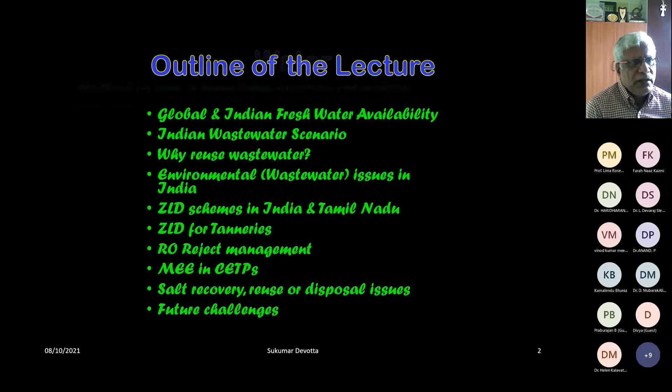Water is a very important commodity for our survival, ecosystems, industries. You must understand water is like energy, almost - it can neither be created nor destroyed. Although you can say water can be formed during chemical reactions, and water also takes part in chemical reactions, the water created and consumed is negligible compared to the water around the globe. So you can say with a lot of certainty, water can neither be created nor destroyed.

So if that is so, why are we facing scarcity? This is the problem. People are saying the world over, population is increasing and fresh water availability is remaining the same, and we are polluting more. Therefore, fresh water will be difficult to get in the next few decades, and it becomes a crisis for the world. The major problem is man-made activities, and there are some issues with climate change. I'll show you that.

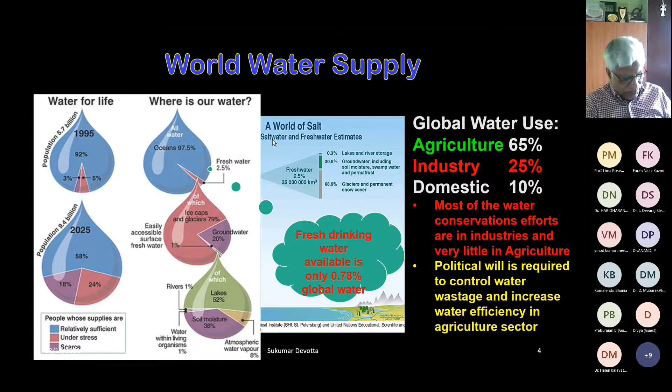Therefore water availability in India is dwindling. This is what I meant by the global water cycle. Water gets evaporated, goes to the sky as a cloud, then comes back as rain, and runoff to the river. But the problem is...

What climate change is saying is that this cycle is not going to be affected in total - the total water available in the water cycle is almost the same as what happened hundreds of years ago. But the pattern of this recycling - water getting evaporated, vapor transpiration, vapor cloud, then precipitation, runoff - these quantities vary independently, while the total quantity remains the same. What IPCC was saying is that if the rain used to spread over 3 months, now the same rain can come in 3 days. So the intensity of rain can increase significantly while total precipitation remains almost the same.

In Bombay, it has happened many times that annual rainfall occurs in a single day. No drainage system can capture that water and drain it properly, so flooding happens. The airport was fully underwater. This is happening all over the world. In New York, just a few weeks ago, the entire city was underwater, including the subways.

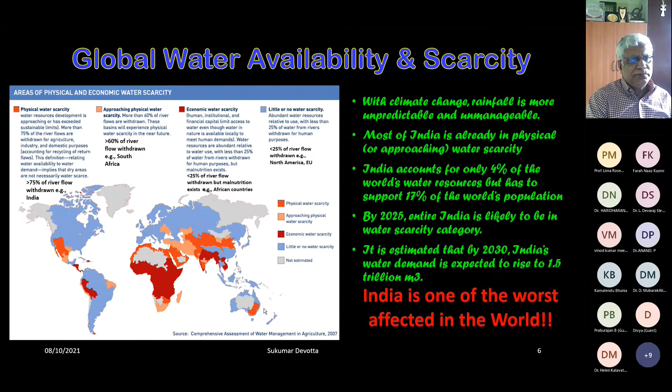What are environmental needs? In environmental engineering, one of my PhD students worked on environmental water needs. It says a river requires a certain minimum amount of water for sustainability of its ecosystem. If you don't provide that water, the river cannot sustain itself and it dies.

I'll give a very personal example. I was traveling from Madurai airport to Dindigul to look at a ZLD project, and I saw a huge bridge. I asked the driver why there was this huge bridge with only shrubs and trees on both sides. He said, sir, this is the Vaigai, we are driving over the Vaigai, and now there is no water, so there are shrubs in the entire river. That is the level of water shortage now. Vaigai used to flood, but now it has shrubs.

This is because we have not provided environmental water needs for rivers, and we have over-drawn. Now, Palar is a classical example. I'm talking about Tamil Nadu because I live there and am familiar with its rivers. We drew a lot of water from Palar and polluted it, and now there is only undercurrent aquifer flow, with no surface water in the Palar river. All these things have caused a lot of water scarcity in rivers.

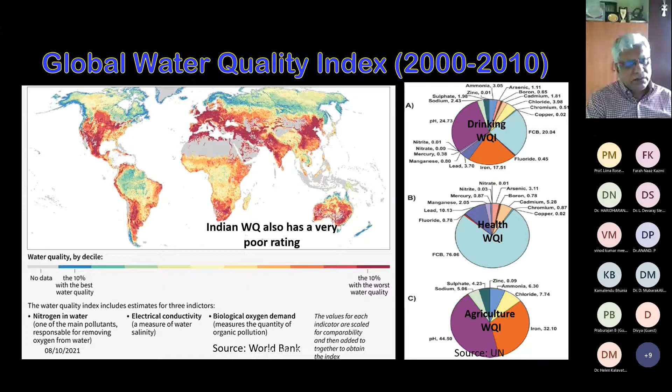And our population is increasing. India has only 2.4% of world area but 17% of the world's population. That means we have to supply much more water than we did 100 years ago.

We have a certain quantity of 1,123 billion cubic meters of water resources, and per capita water availability is 1,720 cubic meters. Usually all scarcity is defined with respect to per capita water availability, and this is below the scarcity line. That means we are already in water scarcity.

When you go for a building sanction to the government, I used to be chairman of the Maharashtra committee, so I know this situation in Maharashtra, but not much in Tamil Nadu. We used to ask, who is going to give you water? A builder might say, I'm a big builder, I have all the money, but who is going to give you water? He has to show the committee that he will have water either from the corporation or drawn from a nearby water body, and he will treat it.

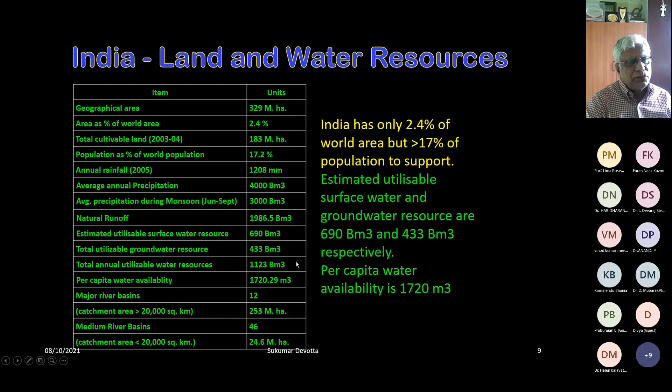This is not easy because for every person he is building for, there is 135 LPCD, liters per capita per day, that much water should be available in a flat or dwelling. If there are 5 people, you multiply by 5, and if there are 1,500 people in a condominium, he has to show 1,500 into 135. Many times they may only get 90. Where is he going to get the remaining 45 LPCD? So this is an issue now in most major cities, because population is increasing but water is not available since we are not able to store runoff. That's where my talk becomes important.

What do you mean by wastewater? Industries use water for many purposes, including manufacturing. They could also be using it for heating in heat exchangers, cooling, as a solvent in cleaning, in textile and leather processing, as a carrier of raw material, or as a carrier of waste matter.

In domestic use we have two types of water. One is called grey water, which is wastewater from your shower, kitchen, washing, bathroom and all that. That is not much of an issue because it may contain a little bacteria but not much microbial contamination or disease-causing microorganisms.

Black water is what comes out of feces and urine in toilets, like flush water. This is difficult to treat because it contains human waste and could have a lot of disease-causing bacteria, so we need to be careful handling black water. In most situations, we target grey water and treat black water for use in some other purpose. I'll come to that.

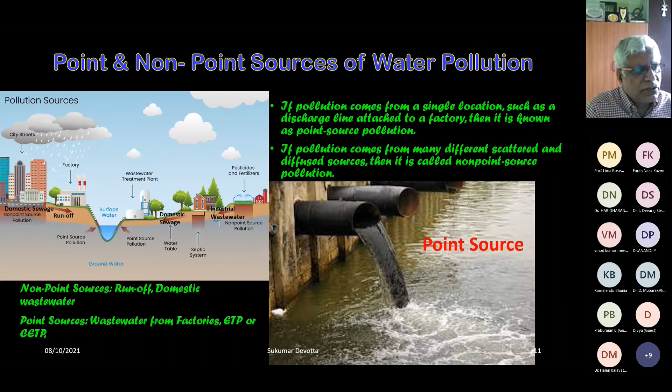So you have non-point source: domestic sewage and some small-scale industries, and runoff from agriculture with fertilizers, detergents, particularly phosphates and nitrogen, causing eutrophication. The river's BOD goes up and dissolved oxygen becomes negligible, so it's not able to provide shelter for biodiversity, microorganisms, fish and things like that. And point sources include industrial discharge and thermal pollution.

We didn't consider this a major issue before, but now it has become one. Earlier we could let out water 5 degrees over the water intake temperature. If I take water at 30 degrees Celsius, I could release it at up to 35 degrees Celsius as cooling water.

But now in some cases it has been reduced to 3 degrees Celsius. That's 3K - the difference between intake and outfall cannot be more than 3 Kelvin.

Earlier we could reuse the water repeatedly, but in some cases now they are requiring it to be one pass through. That means you have to take a huge quantity of water for thermal power stations, and that's why thermal power stations are located close to water bodies like the sea, which causes thermal pollution.

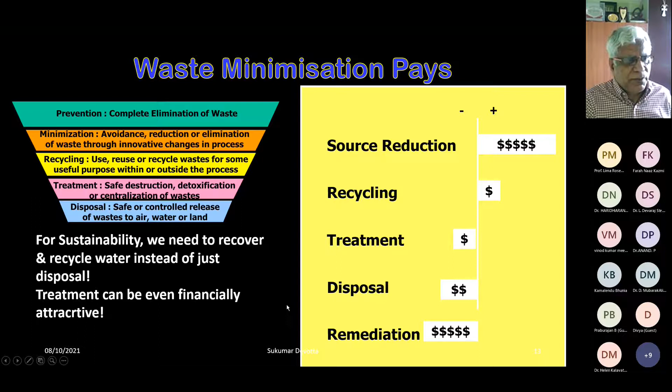Remediation is the most expensive part because you have to spend money to treat water, whereas through certain engineering innovation you can save money. So now the effort goes both ways - avoid waste generation and recover water from waste.

Why do we need wastewater treatment? Because even if you take water and use it in commercial buildings, if you treat it properly, you will be able to reuse it.

You can use treated water for parks, for recharging, for agriculture, and there are many other uses. You can use it for recycling in industry, for air conditioning in commercial buildings. So water that's been treated can be reused in many ways.

That way you can minimize the consumption of fresh water. This is the definition you find from organizations like the UN and WHO - water reuse means treating and disinfecting wastewater, then reusing it.

That is water reuse. For instance, even though you treat it, if you're going to reuse it in your own house, you should disinfect it so that it doesn't carry back any bacteria. Reclamation just means removing and treating it, but more with respect to heavy metals and bacteria, so that it can be reused.

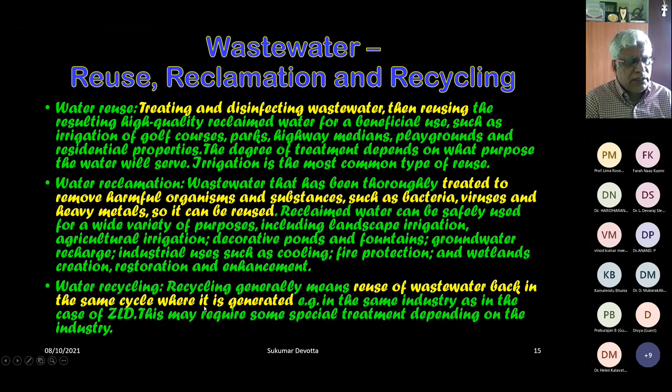And then water recycling - I'll be talking quite a lot about this soon. Are we really reusing water in India? Yes, it is being done in many places.

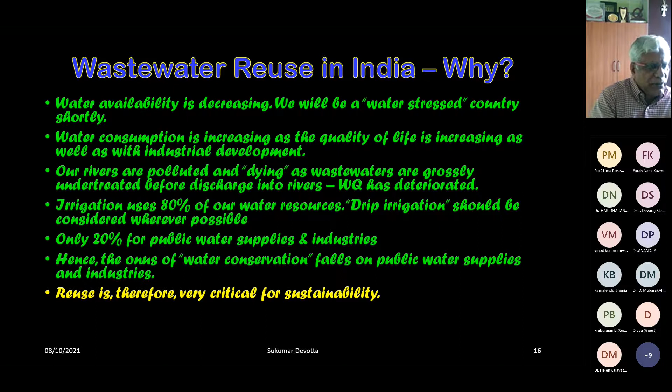It started quite some time ago in Bombay, and now it has percolated to all parts of India. In certain parts, it's compulsory to reclaim and reuse water because they think they cannot supply enough water in the future. Water quality is also deteriorating, so even for water treatment we have to spend more money and effort to supply water.

It started very early in Bombay - they started using it in agriculture, but in a very unhealthy way. If you go to Bombay, past Kalyan, you will find an entire stretch of wastewater canals used for vegetable farming. So all your greens and some kitchen vegetables are farmed there alongside the railway track.

This happened, and now it has come down, but you can still find it near Mumbai. Similarly, in Calcutta, they use waste and wastewater for vegetable farming. Although the vegetables look very fresh, you don't know the uptake of bacteria and heavy metals from the waste. So they started using it, but not necessarily in a scientific way.

But later, some industries started reusing water, like textile mills in Bombay is a classic example. They treated wastewater and reused it within the textile mills. Now, as I told you, this is very common.

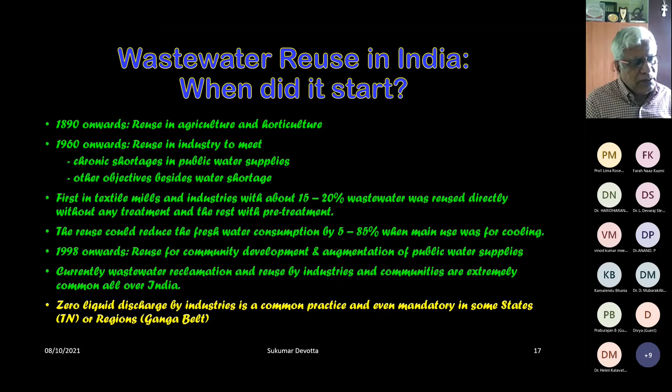If you go to the entire Ganga Belt, all industries, particularly pulp and paper, leather, and distilleries, have been told to practice ZLD, and each has different ideas because distillery waste is different from pulp and paper waste, and leather and textile all have to be dealt with differently.

So people are using treated water for non-food purposes in some cases, but now CPCB and some states have come out with certain definitions for treated wastewater for land use applications. So if you are going to use it on land, it has to pass certain quality standards, and your treatment should be designed for that quality. If you're going to recharge water for ground recharge, there is a separate water quality specification.

All these things are coming up slowly because groundwater recharge now is happening everywhere. So the water quality is important.

And, are we able to recycle water for potable purposes? That's a question which is very difficult to answer.

You can reuse water in commercial buildings for air conditioners, toilet flush, gardens, all those things. These are very common now. They treat the entire water and take only fresh water for makeup. Most new commercial buildings do this. I'm sure it is in Tamil Nadu also, but in Maharashtra, where I lived for more than 20 years, this is almost compulsory.

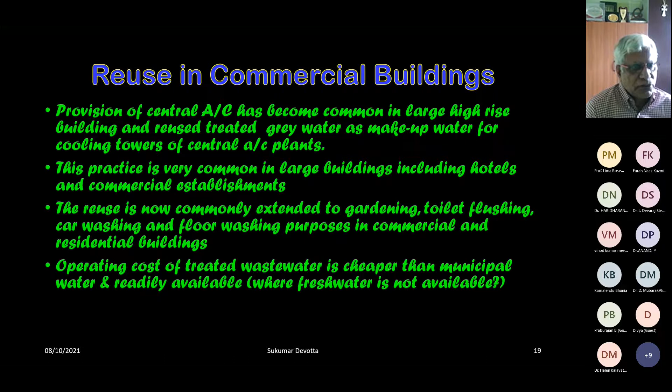So, large industrial reuse of sewage. Many people are using treated sewage, mixing it with their own treated wastewater as dilution, and then meeting discharge norms. So the sewage water is treated by the corporation and they buy treated sewage from them.

Then they treat their own industrial water. For some reason it may not meet the discharge norms, for instance TDS, so they will buy treated wastewater from the municipality, mix it up, and now this is being allowed. About 20 years ago this was not allowed and we were strict about it, but now it is allowed in some states, including Tamil Nadu.

This is particularly true for landlocked plants where they don't have a discharge facility. As I told you, if you have a plant near the Palar river, where will you discharge, because the Palar doesn't have water? So you have to buy and probably use treated sewage water, dilute it, and send it.

But all these things require a lot of effort and money. When there is no alternative, either they'll say you do this or you close the plant and go. So that means it's survival - I have to do it if I have to continue my business. There is no other option. If operating cost goes up, I can tell you it's not cheap. I will tell you later about the cost. And these are all happening today in many states.

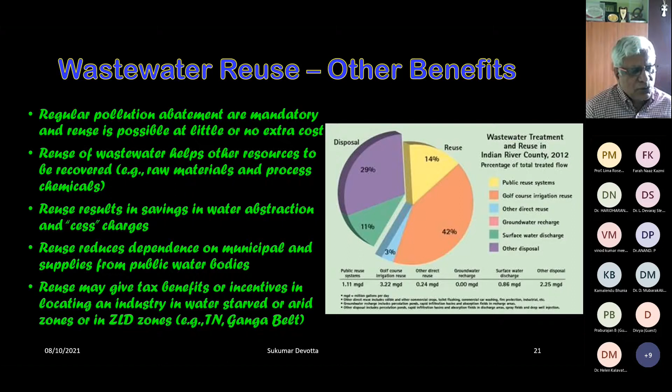And that means it's not going to meet the norms, and so the rivers will continue to get polluted. This is the main problem. And you don't get this water from the municipality free, you have to pay for it. Although it is still dirty water, you have to pay for it. That is the irony. You may think the industry or municipality is getting rid of its wastewater, so they'll give it free. No, you have to pay for it. And so many industries buy wastewater, municipal sewage water, so-called treated, and then use it for dilution of their treated water.

So let's look at the terms we use. We are going to use STP, which is domestic and municipal sewage, black water treatment. Sometimes it is mixed with grey water, so you get grey water and black water, but then you treat it to remove contaminants before it is discharged into a public water body. Sometimes it's mixed with runoff, but it goes into some public water body. That happens everywhere, so you call it a sewage treatment plant.

ETP is an effluent treatment plant, mainly for any individual industry. For instance, I may have a large textile mill or refinery in Manali, I'll have my own ETP. Because I deal with refinery oil, I know how to treat that. So I will treat it and then I may reuse it or discharge it into a public water body. I have to treat that industrial wastewater for a certain quality before I discharge it, or I can reuse it. And even for reuse, there are standards available.

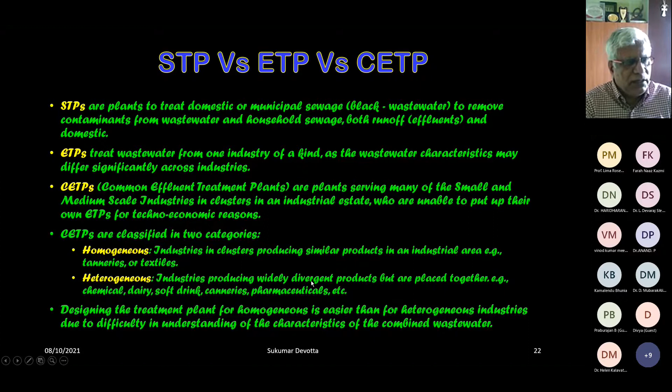A heterogeneous CETP is like industrial Sipcot, Cuddalore, where there will be pharmaceuticals, other industries, and soft drinks. That means their wastewater is not as straightforward as homogeneous wastewater, so they have to take multiple steps to make sure the water discharged is treated properly. If you have dairy, it will have a lot of fat in it. If you have pharmaceuticals, they are very recalcitrant, meaning you cannot degrade them so easily. So heterogeneous CETP is much more difficult to handle than homogeneous CETP.

All these things can be designed based on the physical characteristics of wastewater for norms. But unfortunately, color becomes the most important thing for society. If they see any colored water, they'll say it's polluted, and that's not really true, because even if you have a dye in limited, acceptable quantity, it will have color. It doesn't mean it's polluted, but that is the way it is now with color.

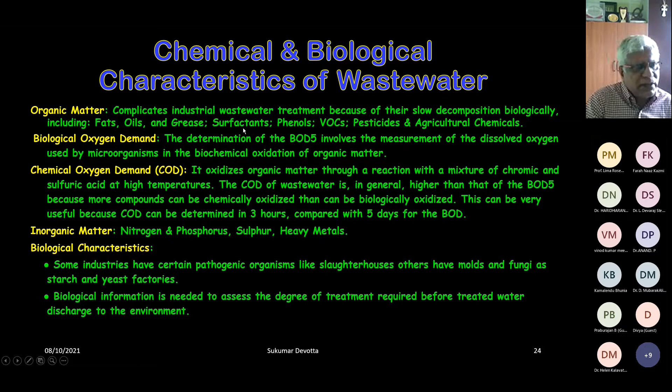Whereas I can understand about chemicals. There are certain chemicals - today there is a news item that IIT Madras has done a study, and they are saying a lot of pharmaceutical molecules are found, and these are non-biodegradable molecules, so it's a problem, which is true. Then you have chemical and biological characteristics, and we define that. In the chemical category, there are many micropollutants becoming very important, particularly pesticides and pharmaceuticals, and it's not easy. So if you find certain stable molecules, you have to treat that water with specific targeted degradation in mind, in the design of your ETP.

Can we reclaim water for potable use? The problem is we have been doing it without saying it. If you take any water from the river, we are almost reclaiming river water for potable use. But that river gets polluted by discharge of polluted or untreated water, yet you are drawing water in some other place, thinking it's good water. So the major problem is if you want to do that properly, like some countries do, particularly Singapore, you need a very good water quality survey.

Unfortunately, we do not—although we do surveillance, but we don't do control and punishment. Because if you go to CPCB website, you will see, oh, this river is polluted. That's it. What are you going to do? They have no money to do it. They'll only tell the government, you take care of it. That government will say, we'll try to do that. So that's how it goes.

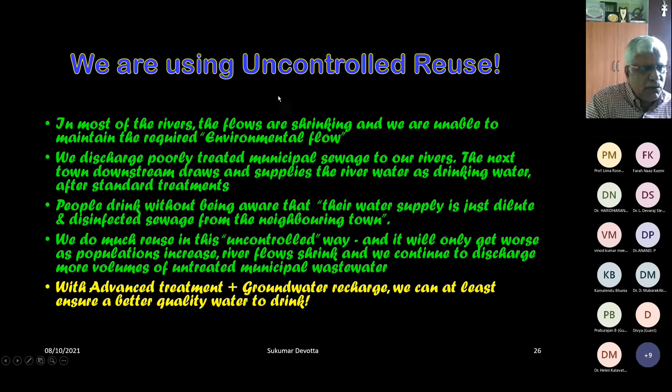Unfortunately, this happens because of the shortage of water. The environmental flow is not there, and the river flow is contaminated.

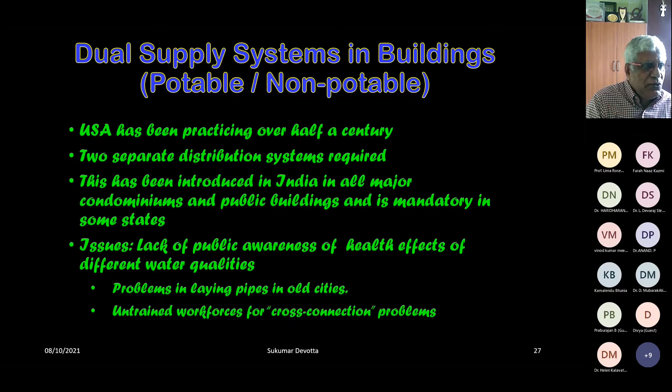So in buildings now we are using dual supply systems: you have grey water treatment and black water treatment. Grey water you can use for the garden very easily—it's only removal of fat and some dirt and things like that. Whereas with black water, you have to be careful. So people use and treat it, and then dispose of it.

So if you take any STP or ETP, you will find they have very common unit operations. They remove trash, then remove suspended particles, treat it in primary treatment, then aeration, then secondary treatment. Then you get sludge, which is treated and dried and disposed of. You can make biogas out of the sludge because it contains a lot of nutrients, and then burn it to produce power. So basically they have trash and particle removal, then primary treatment for physical removal of materials, then biological treatment for degradation of molecules likely to be there, then treatment of the sludge. So these are the steps you will have.

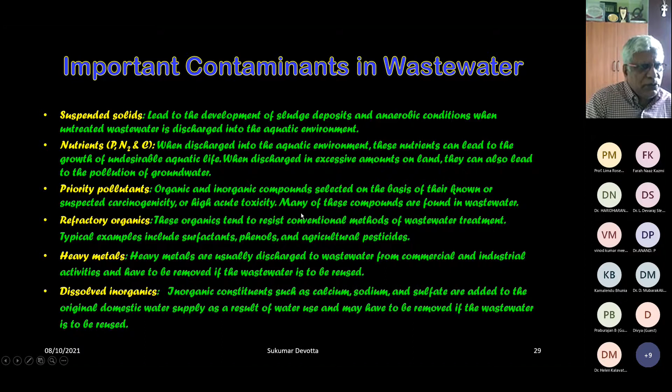You have to treat wastewater differently depending on what it contains. It can contain heavy metals, inorganics like salts—sodium chloride, calcium sulfate, magnesium sulfate—suspended solids, particulates, nutrients, and priority pollutants. So you have to treat your water according to what it contains.

Wastewater treatment contains three types of unit operations. There's physical unit operation, which removes particulates by settling, flocculation, sedimentation, and filtration. Then there's chemical unit operation, where certain chemicals facilitate removal through oxidation, reduction, precipitation, coagulation, and so on. Then there's a third one, biological unit process, to remove biologically active compounds. And then you also do this for the sludge.

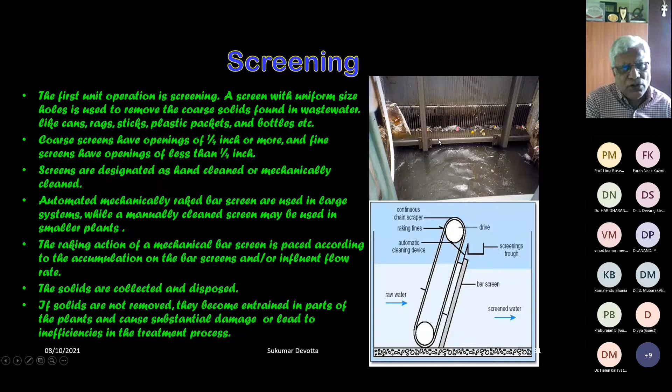So basically this is screening: as water enters the ETP or STP, all the solids are removed using a screen, because these can hinder further processing. So you have to remove this, and there are many methods of screening, but one such screen I've shown—this is the most common one.

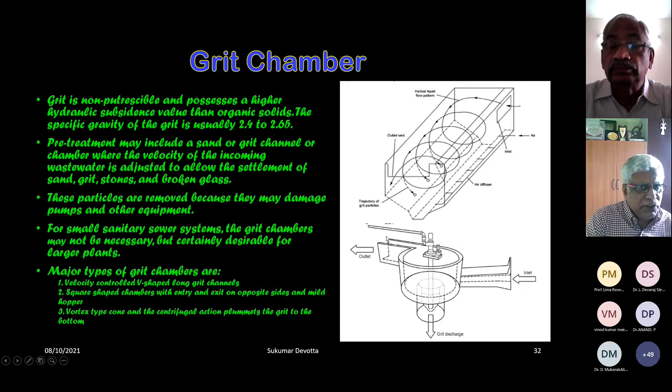Then you have larger particles removed. Once that screen is passed, larger particles are removed in grit chambers. It could be plastic bottles or similar items, and you capture and remove them. There are many mechanisms to do that, and this is called the grit chamber, which immediately follows the screen.

Then, if you want to treat wastewater with fat and grease, like from the oil industry, or even municipal sewage which contains a lot of fat, you have to remove them because they are in suspension. So you treat them in an oil remover depending on the content of the wastewater, and this can be done through a filtration mechanism to remove fat and grease.

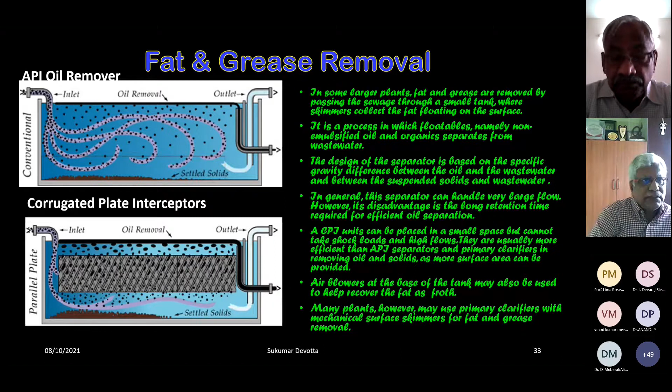When it comes to ETP or STP, the first thing they do is flow equalization. That is because the effluent quality or contamination will not be uniform all day long. It can be very high during early morning because people are bathing, using toilets, and things like that.

So in order to equalize, you have an equalization tank, which acts as a buffer. The water comes in and stays for a period, and sometimes you provide aeration because it also treats the water. This water is then drawn for further treatment so that the ETP or STP is not subjected to any shock - concentration shock, temperature shock, or any characteristic shock. Otherwise, depending on the day, rainy season, and so on, the characteristics will vary. It's also used as a temporary storage if the ETP is not working for some reason, so it has a multi-purpose function.

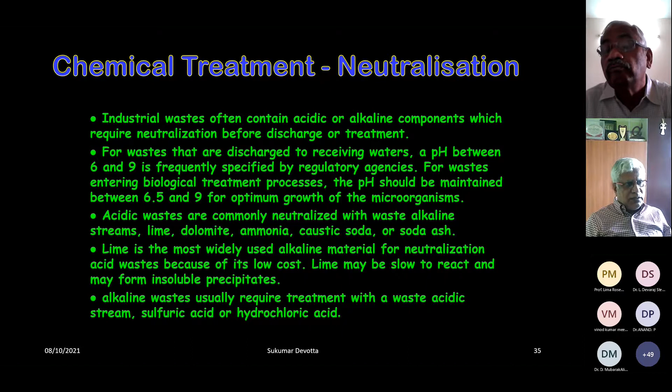Then, depending on what kind of wastewater you are dealing with, you will also be involved in neutralization, because you have to maintain pH close to 6.5 to 9, depending on the ETP. If it is too acidic, you add alkali; if too alkaline, you add acid. So you maintain neutralization - this is possible and is done mostly in industrial ETP.

Then you can have oxidation reduction in the process. People will use, depending on the wastewater, hypochlorite, hydrogen peroxide, ozone, chlorine, oxygen, and all that. These are mostly for industrial wastewater treatment.

But sometimes we have handled many cases where domestic wastewater is mixed with industrial wastewater, so even in STP these things happen. For instance, where small-scale industries are located, you can have domestic sewage mixed with industrial wastewater, because although they have their own treatment, invariably on the periphery they can get mixed. So you need chemical treatment also.

Primary treatment is simply sedimentation, a physical process. You allow the water to go through a tank, and the heavier particles tend to settle. In some places, you have paddles which move at a very slow RPM - you can hardly see the movement. So it settles at the bottom, and then you remove the sludge from the bottom. This is the primary treatment.

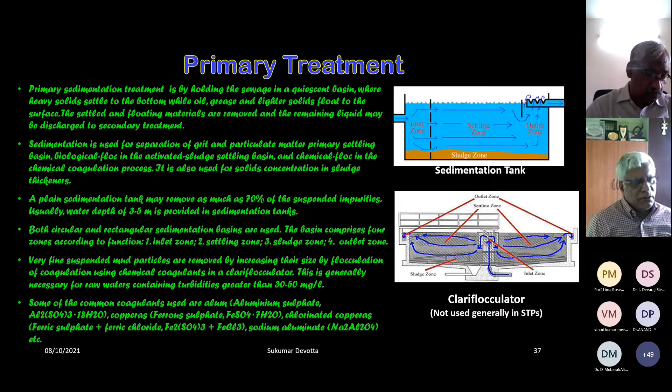In some places, you have a flotation system, like froth flotation. You allow air in, and particles - particularly oil and lighter particles - tend to get lifted up in flotation, and then you skim it off the top so the particles are removed from the surface of the vessel. Or you can apply vacuum in some cases, to suck out and remove the particles. There are also certain promoters for flocculation and sedimentation.

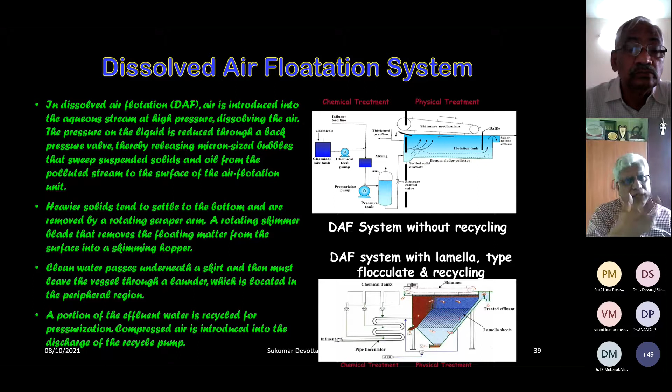Dissolved air flotation is another method used for flotation. This provides oxygen as well as helps to treat the particles, so you have a combination of chemical treatment and physical treatment in the dissolved air flotation system. These methods depend on where you require them, particularly for certain contaminants and industrial activities, not necessarily for all.

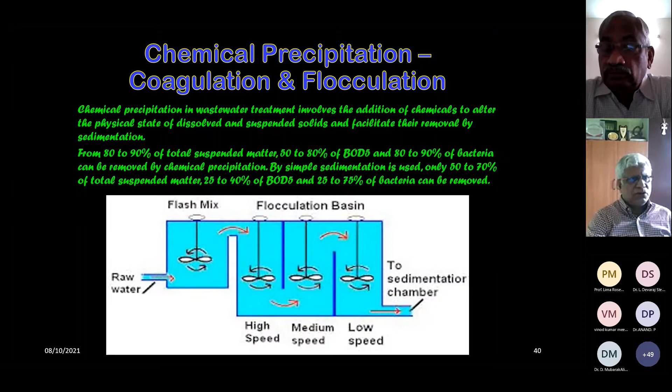Precipitation is very common in all STP and ETP, because you add some flocculants and slow-mix them so that the chemicals coagulate, removing contaminants and suspended matter through this flocculation system. This is present in almost all treatment plants.

Then you have secondary treatment, which is biological. There are many types of biological treatment plants and bioreactors, and each bioreactor has its own advantages and disadvantages.

If you go to one supplier of SBR, they'll say, I can do all the operations in one reactor. Another fellow will say membrane bioreactor is the best for this. So each has its own advantages, but it's not one size fits all. You have to decide, depending on the industrial character and wastewater characteristics, which is the best one.

You have to choose the appropriate one. But secondary treatment is important, because without biological treatment you cannot get the desired purity of wastewater. So you have to treat water with oxygen, because you'll be supplying oxygen through air.

But in some cases we supply pure oxygen. In one case I've seen them supplying ozone, because their BOD level is so high they're not able to maintain dissolved oxygen to that extent. So they supply ozone, which is oxidizing as well as supplying oxygen. These are all possible depending on the intensity of pollution and the characteristics of the water.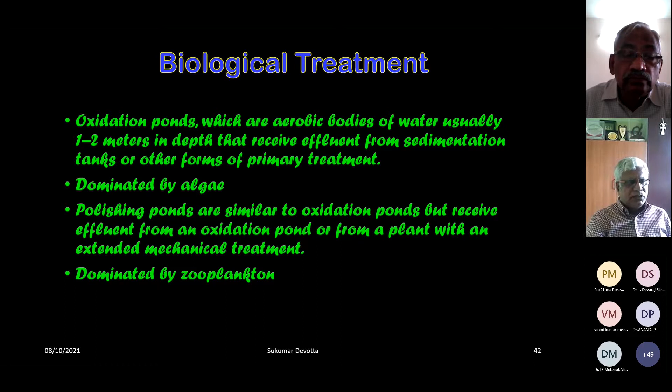It's basically converting organic matter into CO2 and ammonia. So you'll get a lot of ammoniacal smell when you go around secondary treatment. This is a big problem because it's not allowed. So you have to be careful about ammonia evolution in that area. There are methods of suppressing it.

Extended aeration is another one, just an extension of the biological systems. These are available, there are many vendors. For everything there are many vendors, so it's not a problem.

The problem is how to put them all together—that's the big technology. There will be vendors for aeration systems, tank building, stirring, oxygen, ozone generation, in situ ozone. You'll get that in situ, but putting them together is very difficult engineering. You need a good contractor for that.

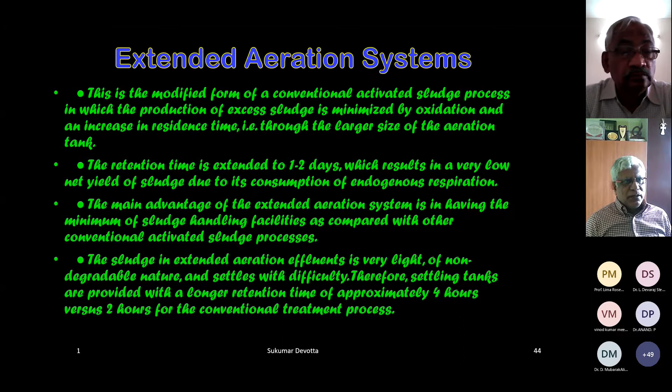This is secondary treatment, biological treatment, you can treat that. You have to make sure—in many places they don't provide enough aeration, therefore it doesn't get reduced and BOD doesn't come down. This is a major problem because more aeration and stirring consumes so much electricity. To conserve that electricity bill, they'll only put in 1 or 2 stirrers.

There could be 16 stirrers total. A classical example is the STP near Mumbai Airport. When you're landing in Mumbai, there is a huge STP—you'll find about 16 stirrers, but only 2 will be operating. That means they're using the rest of it as a settling tank. So when you don't supply oxygen, the secondary treatment isn't good enough.

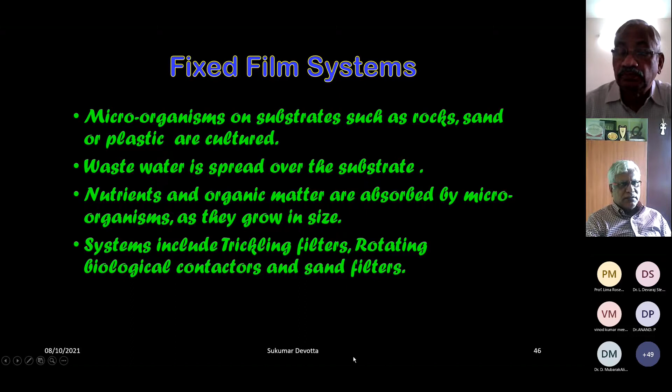Fixed film systems—that means your microorganisms are fixed on certain materials like rocks or plastics, and then you use that for treatment. This is a trickling filter system where you have a fixed bed, and even rocks are used. You're able to treat the water because microorganisms are on the solids and slowly get released.

You're able to treat the water and take the sludge at the bottom. These are pretty common old-type systems. Even today you can find them in many industries.

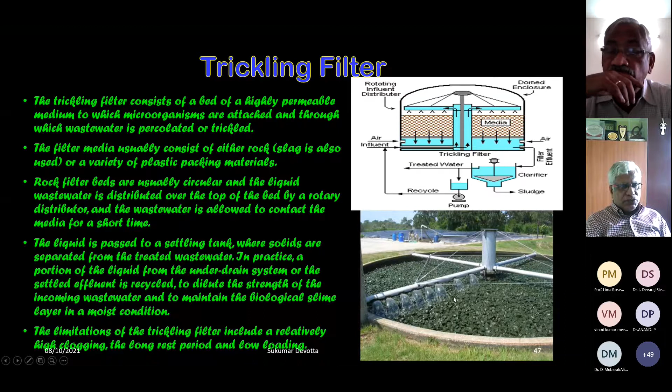I told you sequential batch reactor is one reactor that does everything sequentially, so you save space, but it's quite difficult to manage. Although it's easy to say, doing all these cycles in one vessel in a cyclic manner requires a lot of planning and control, but it is still being used.

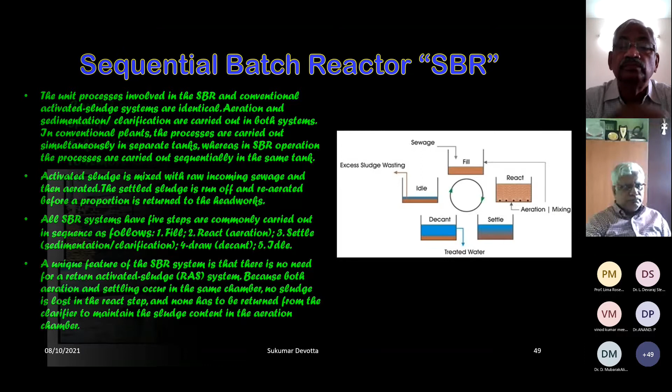Because it's open to atmosphere, water gets treated, and then you get overflow. You'll find this, but it's not very effective—it can be misused. I've seen many plants with very poor treatment of the water, but they have enough water for dilution.

Like paper plants in Kerala—Kerala has plenty of water, so they use open lagoons to treat the water, and it's not reused but goes back to the water body. When you ask them whether it is polluting, they say we measure concentration upstream, at the discharge point, and downstream, and we're not able to find any difference, so it seems to be working. That's the way it is, because they have large water flow for dilution with high dilution potential.

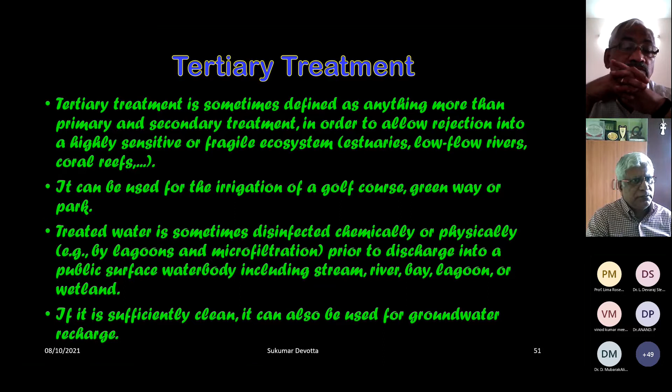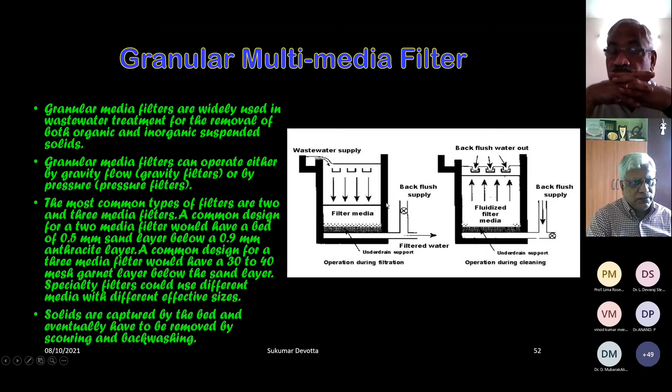The media filter can remove particulates and even some organic matter through a particulate multimedia filter, including activated carbon, sand, and things like that. You have to flush it periodically to make sure it doesn't get clogged. This is very common in industrial wastewater treatment, multimedia filtration, particularly for oils and fats.

Then you can have a fixed bed carbon adsorption. As I told you, if you have to treat organic contaminants, activated carbon is one of the best methods. It can remove VOCs and organic molecules, and you can get good removal of organic molecules.

Biological treatment is mainly for sludge treatment. This is used in plants where they have huge sludge and a problem of sludge disposal, because today any chemical factory's sludge is treated as hazardous waste. That means you have to dispose of this sludge in a TSDF, a secured landfill. It is very expensive, and in Tamil Nadu there is only Gummidipoondi, so you have to transport and send it there.

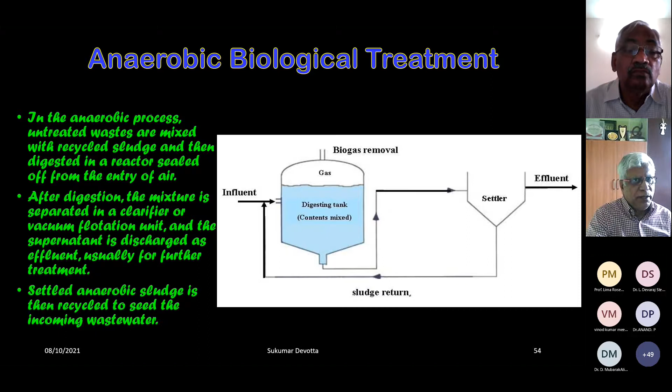So instead of that, if you treat the biological sludge in your own place to produce power, and recover the water, the amount of solid to be disposed will become very, very low. So this is a very good method for that.

We have many advanced methods. What I've talked about now is normal tertiary treatment, but let's now concentrate on advanced tertiary treatment. With advanced tertiary treatment, like membrane application, you can recycle water. This is the most common advanced tertiary treatment in India, particularly in Tamil Nadu.

But if you have more tedious total dissolved solids like sodium chloride and sodium sulfate, this poses another challenge, because a membrane can only filter water, but then you get a reject. What do you do with the reject? You cannot dispose of it. So it still requires recovery of water and separation of dissolved solids through multiple effect evaporation. I'll talk about that.

Then you have chemical disinfection like chlorination, ozonation, hydrogen peroxide. Now we have UV treatment, so there are plants with UV treatment so that it gets disinfected without adding any chemical.

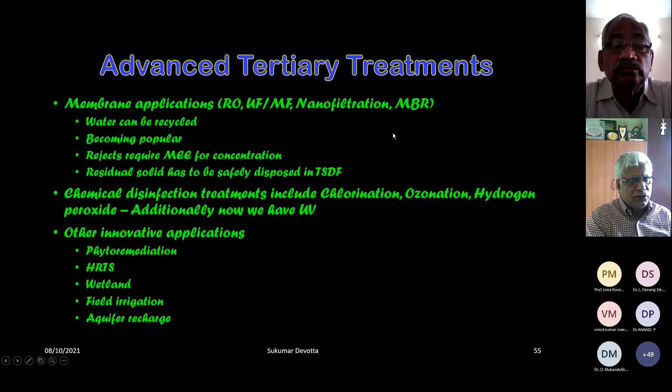I've seen many phytoremediation systems, but these are mainly for use rather than recycle, so I'm not going to touch much on that. Aquifer recharge is allowed, provided you have treated your water to the quality required for aquifer recharge. But we are not going to deal with this in this talk, because we are only considering recycling of water.

Membrane separation is the most important thing. Invariably you will be dealing with both ultrafiltration and reverse osmosis. Ultrafiltration is a pre-treatment before RO treatment. Ultrafiltration will remove suspended macromolecules and suspended solids, but it will not remove water and salt. It will permeate, and the permeate will still contain salts, and you will get water.

There is no loss of water in the process. You get a concentrate, and you would have removed any large molecules and suspended solids. This is important, otherwise the RO system will get clogged, its functioning will become a problem, it will require much higher pressure than normal, and its efficiency will be poor. So ultrafiltration is a must as a pre-treatment before it goes to RO.

RO allows only water through, and the retentate will contain salt. So this is the main problem. But these are used extensively in zero liquid discharge, for instance you have RO plants.

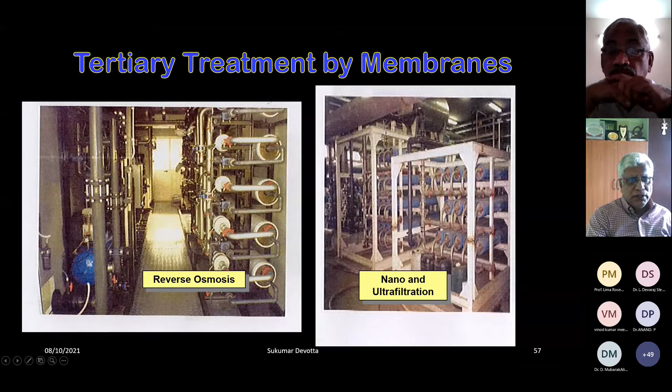You can have nanofiltration, similar to ultrafiltration, as a pre-treatment. You have to take this even when you take sludge, because sludge may contain quite a lot of water. In one of the audits I did, the pollution control board asked, 'Where is the water going?' Then we did an audit of the sludge. Sludge can occur in 2-3 places, and if you squeeze that water out, you get good quality water.

So sludge dewatering - there are two reasons why you do dewatering: because you recover water, and second, you are not going to spend money transporting wet sludge if it contains 30% water. That means you are paying for disposal of water rather than solid hazardous waste disposal. So sludge dewatering is important - it reduces sludge transport cost and also provides water recovery to some extent.

These are common in industrial plants - plate and frame, which you are familiar with, the filter press.

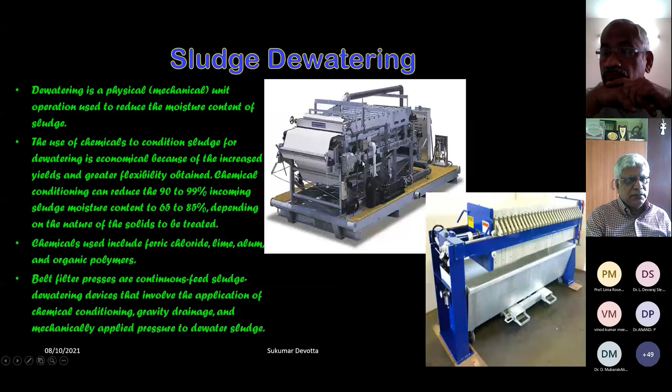Then disinfection of water - I told you we are now using ozone very commonly because of environmental concerns on chlorinated substances. We are avoiding chlorine but going more for ozone in CETPs, and in situ ozone generators are available, so you can buy ozone generators and use them. In some places you have ultraviolet.

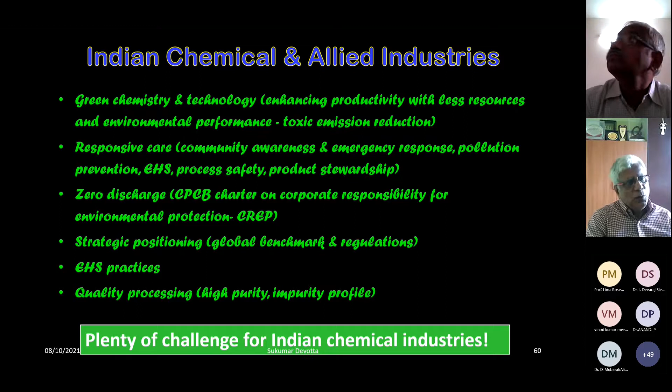So industries do face a lot of problems with zero liquid discharge because you can treat water up to tertiary treatment, but going for zero liquid discharge in industry is not easy - they may have different pollutants that are not amenable. And if it contains TDS, that's the biggest headache. So I'm going to deal with one industrial wastewater where TDS is an issue - that is leather.

The Central Pollution Control Board has categorized 17 industries as highly polluting industries - paper and pulp, fertilizer, dyes and intermediates, sugar, petrochemical, and one of them is leather processing, including tannery. So I'm going to talk about tannery as an example.

Today the problem in India is not all states impose the same conditions. The Central Pollution Control Board gives guidelines and says you should implement them, but some pollution control boards feel these are too difficult and therefore relax them, while others don't relax. So there is no uniformity across India. Now we are concentrating mostly on the Ganga belt - if you have a plant there, the treatment standard required will be much higher than away from the Ganga belt, which is not fair, but that's the way it is today.

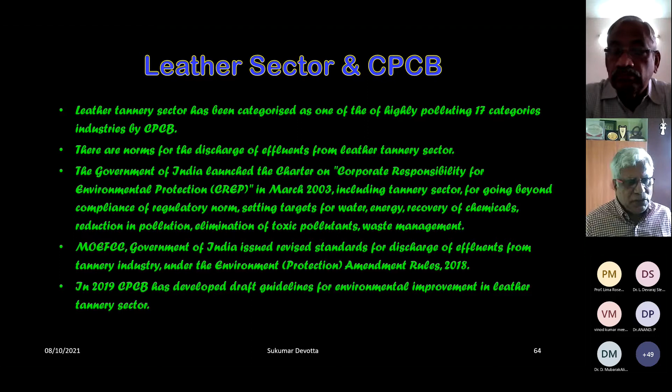The leather industry benefits the Indian economy a lot - it's a very big industry, provides a lot of employment, and generates a lot of revenue, including foreign revenue. Therefore the government looks at the leather industry more favorably by providing a lot of incentives and funds. Most CETPs in the leather sector implement ZLD through close cooperation between central government, state government, and industry. CETPs are provided with almost 65 to 80% of the cost of setting up the plant by the government - only OPEX you have to operate yourself, but the bulk of capital cost is provided by government. The Central Pollution Control Board gave its own charter on what should be done, which has been followed now, but it's not a law, only a charter, so it didn't work well, though it gave some impetus to ZLD.

Later, ZLD was made mandatory by the government. So what is zero liquid discharge? It's something where we treat water to get almost 90% water back into the system. This is now practiced in almost all industries in Tamil Nadu, but in the northern part, for instance in Gujarat, ZLD is not a must because they allow sea discharge - that means the tertiary treated water is disposed of, whereas we recover water even through multiple effect evaporation.

This is important where freshwater scarcity exists. Example is Tamil Nadu, because we have real freshwater scarcity and the government is struggling to supply for potable purposes. Therefore they are not able to supply fresh river water for industrial use - agriculture and domestic use is the main problem, the main usage.

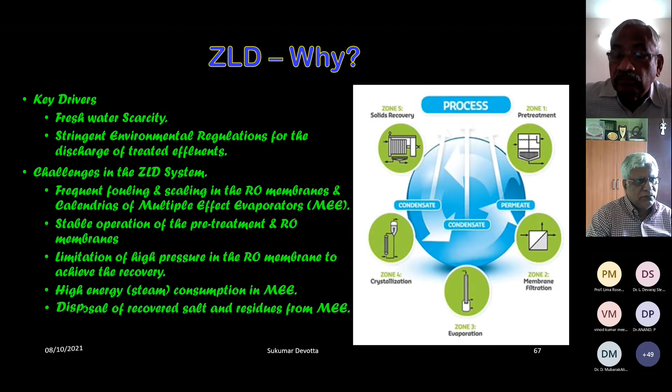There are many ETPs and CETPs in India for the tannery sector, and you will find that many of them happen to be in Tamil Nadu. That is because the Tamil Nadu Pollution Control Board is imposing that condition, because the government is not able to supply water to the industries, and they have set a limit. This is the main problem.

Total dissolved solids, TDS. When you get raw effluent, it may get even up to 23,000 milligram per liter, but what is allowed is 2,100, and this is the most stringent value in India. That is because we allow this for land application, whereas in other states where sea disposal is possible, you can go to 20,000. So if you take care of this, you don't require advanced tertiary treatment, you can get rid of it.

So level playing is a problem across India, but ZLD is going to be applied over another 10-15 years. ZLD will be applied all over India.

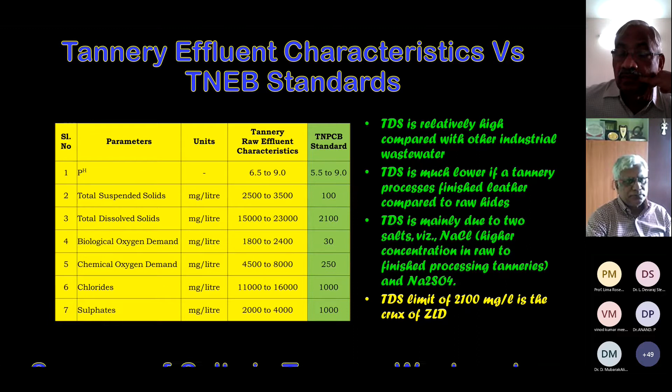Where does the salt come from? In leather, they use all kinds of salts, but bulk of it is sodium chloride and sodium sulfate. So sulfates and chlorides are the salts used mainly for preservation. If you are treating raw leather, raw hides, that means you are likely to use more salt. If you are using treated hide or leather for further processing, then you are likely to get less TDS. So it depends whether the industry is treating raw hide or treated, partially treated.

So these are all there, and some tanneries will use partially treated hides, so their wastewater can be less problematic than raw hides.

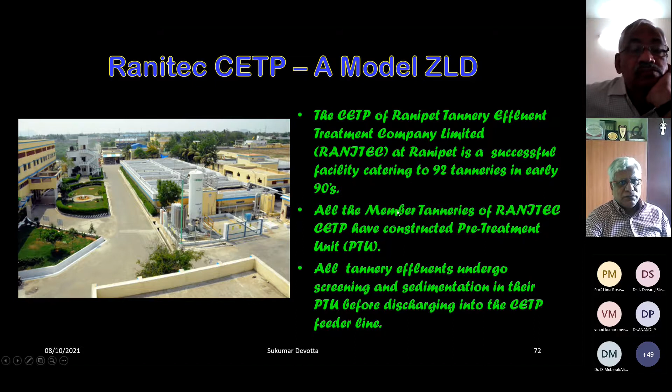This is the plant where I have been involved for quite some time, and I consider this as a model CETP in the whole of India. You can see how neatly it is kept, but what they are treating is dirty water. It looks like a hospital, but this is the oxygen plant, air separation. So they are able to supply oxygen for the secondary treatment, biological treatment. Air is not adequate, so this is there.

In order to have a CETP, you need to build conveyance lines. Tanneries are dispersed all over that area, and you have one CETP, and you have to convey all this wastewater to this plant. Then you treat the water, and you have to return the treated water back to the tanneries, because if they are supplying X million liters, then after treatment I have to return them 0.9, depending on the recovery of water in the CETP. If I'm giving 100 liters, I may get 90 liters back.

So this is the scheme by ZLD. They use water in a diffused way, then all the wastewater is slightly pre-treated and sent to the CETP. The CETP takes total responsibility to treat it, then sends it back to the individuals.

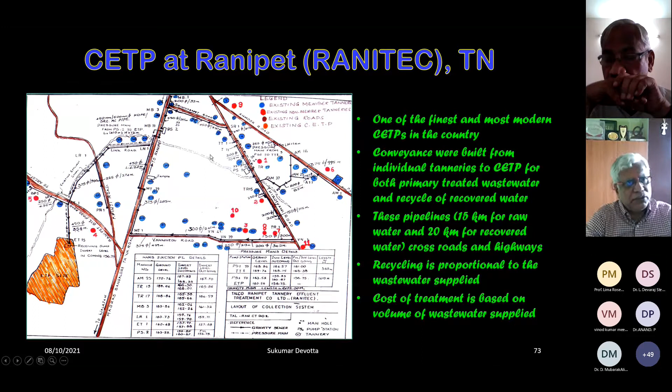But there is a pre-treatment by each tannery, because one of them is chromium recovery. So there is a condition that if you are going to send your water, you should recover your chromium from your wastewater, then send it to me. So each tannery will have its own pre-treatment unit, basically pre-treating, removing certain chromium as the major part, but then the rest of it is treated, and to some extent even solids are removed, bulk solids are removed, so that it doesn't clog the pipeline.

Kilometers and kilometers of pipelines are there, and pipeline clogging is one of the major problems of CETP, and it goes across public roads, highways. So if suddenly a pipeline gets clogged in a highway, then it's a big problem to rectify.

So they have to do it properly. Individual tanneries are responsible for pre-treatment before it goes, and it is metered. So they know that they are sending this much water in a month, so they expect back a certain quantity of water depending on the recovery.

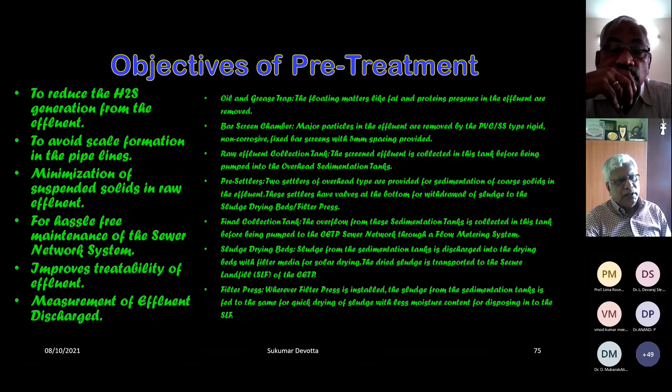Chromium was the major problem in the leather industry, and now chromium recovery and even chromium usage is reduced by biological dehairing. So chromium usage has been reduced and chromium is also recovered. Chromium pollution has come down significantly because of these two innovations and the CETPs.

CETP, like any ETP, has primary, secondary, tertiary treatment, then it goes through advanced treatment, ultrafiltration, reverse osmosis, first stage, second stage, then it may have a third stage depending on their ambition to recover water.

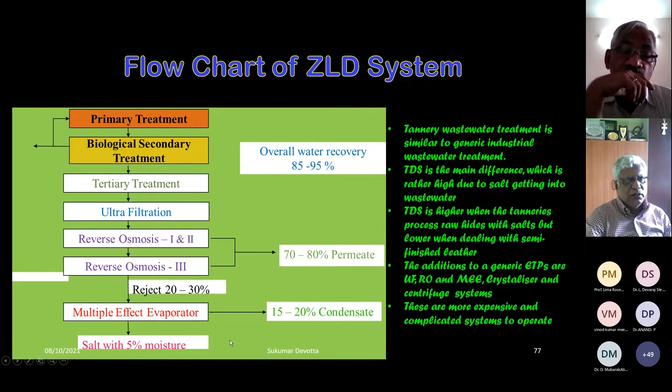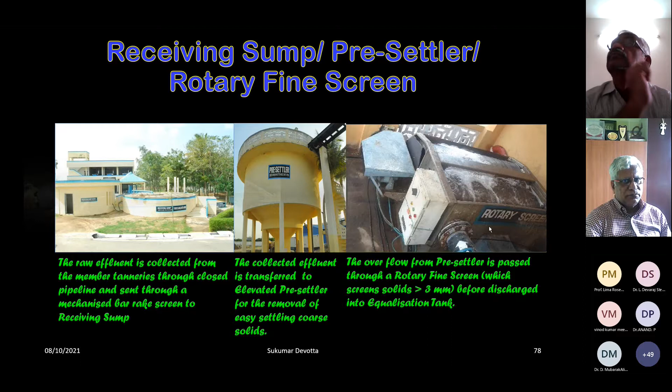So you have a receiving sump where the collected effluent is transferred and overflows. This water from the overflow is sent to the equalization tank, where you don't want to have any shock to the ETP.

Then you have physical separation using primary treatment. It's just adding some alum and polyelectrolyte to precipitate or flocculate the solids and remove them. The solid from this is compressed, and you take the clear water and send it to further treatment.

Then some plants have their own secured landfill, a triple-lined secure landfill, so sludge coming from this was allowed before, but under current regulations this is not allowed. You cannot store your sludge on your own site; you have to send it to a TSDF.

That costs quite heavily, about 3,500 rupees per ton to dispose of sludge. So if you have 1000 kilos, that's 3.5 rupees per kilo. It's quite a lot of money for the industry.

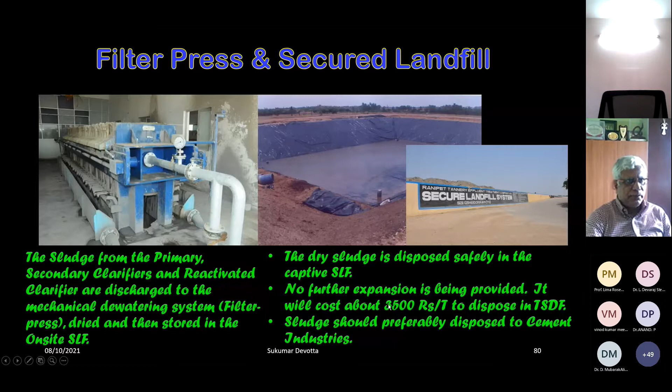Then pre-aeration, followed by biological treatment. This is the most difficult part because leather contains a lot of organic molecules and fats. With water conservation by tanneries, the incoming salt concentration has increased, and incoming contaminants, particularly BOD and COD, have also gone up. So this is a very difficult operation because traditional biological microorganisms don't work well, and you need much more oxygen.

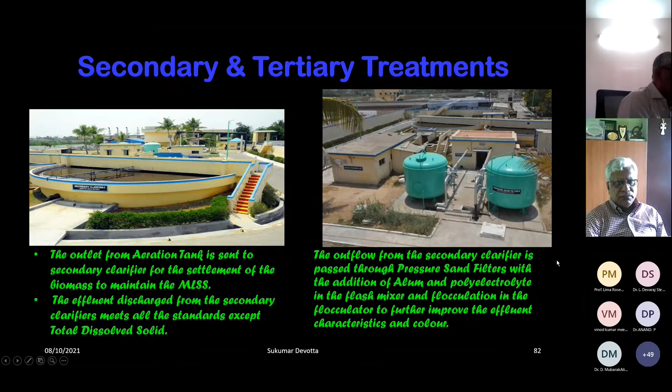So instead of using air, they produce oxygen and use it for biological treatment, whereas traditionally air was used. After secondary treatment, you still have certain scavengers needed for removal, like a dual media filter, because we still have suspended particles and organic molecules. It's sand and activated carbon at certain depths, allowing you to remove solids as well as certain organics.

You add this depending on your wastewater; otherwise you can bypass this. So you pre-treat with ultrafiltration.

You have huge banks of ultrafiltration, and the most important thing is maintenance. If you don't maintain it, the ultrafiltration backwash should be done periodically, and you have to check the pressure buildup and all these things. Otherwise the membrane gets clogged and gets damaged. They are very expensive, and if damaged, you have to pay to replace it. So it's a difficult operation, but it's done now — there are 10 CETPs with ultrafiltration and RO.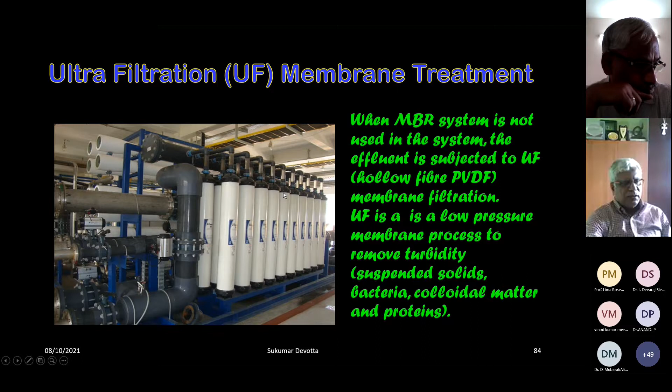This is RO. Depending on the ambition for water recovery, you can have low pressure RO or high pressure RO. Low pressure RO can be about 30 bar, and usually you should get about 50% of the water recovered using 30 bar. But then invariably we go for a second RO at 60 bar, where you get another 50% of the first reject — that means I can boost recovery to 75%, 50% plus 25% more.

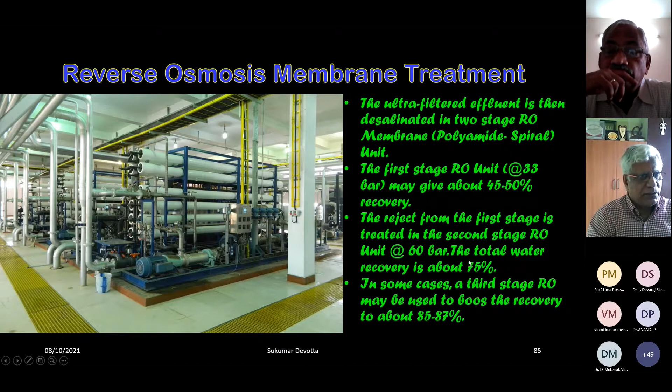Sometimes we do a third stage RO, at 90 plus bar, around 95 bar. These require very high pressure pumps and very high quality membranes to operate at that pressure. Here you get another 25% of the water, boosting wastewater recovery to about 85%.

It also increases the TDS, because as you keep recovering water, TDS keeps increasing. So my TDS now has gone up. In a way it's good, because my steam requirement for evaporation in the final treatment comes down significantly — the higher the salt concentration, the lower the steam consumption.

I'm sure you all have learned about multiple effect evaporation in your courses. But what you learn in your BTech or MTech is highly simplified multiple effect evaporation. What you learn in a book, you never see in the industry. I have worked with sugar a lot in Maharashtra, and now in CETP, you will find that what we learned is too simplified.

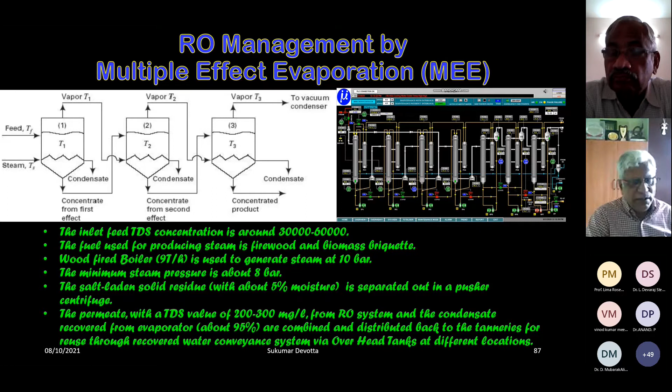So you concentrate in a multiple effect evaporator.

But sometimes, particularly in textiles, I've seen plants use mechanical vapor recompression and thermal vapor recompression. Mechanical vapor recompression uses a compressor, but actually it's a fan with very low delta P. So you run the unit with very low delta P and recompress the steam coming from first effect and put it back into that. I'll show you the plan.

TVR works by using high pressure steam, motive steam, to recompress the evaporated water and put it back into the system. This way I can reduce the fresh steam requirement, but in mechanical vapor compression you need power, and in thermal vapor compression you need high pressure motive steam. Both have disadvantages, but it improves the steam economy very well.

So this is with thermal vapor compression. The steam coming from the second effect - you are putting steam here, then vapor goes into the second one. The vapor from this is compressed, and part of it is recycled, but part of it is taken and used with motive steam, high pressure steam, to compress through an ejector, and then you recycle that. So you are maintaining steam by recompression.

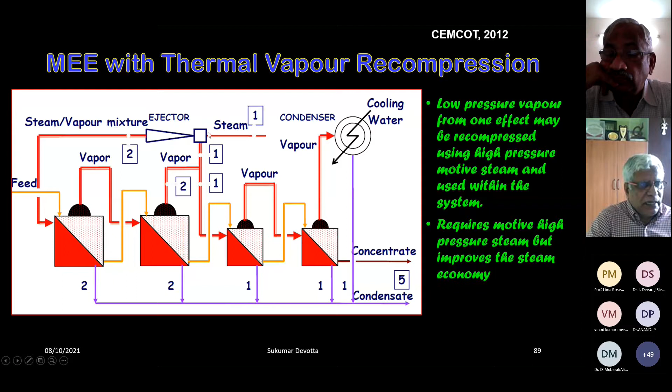So this is the steam requirement mainly - instead of putting steam directly to the first effect, I put it in as motive steam. So I need at least 10 bar steam, preferably 20 bar, so that my compression is more efficient. My steam efficiency increases and I can reduce the number of effects later. So this is one possibility, and it's very common in India because you don't require electric power, you only require motive steam.

Mechanical vapor compression is you get the steam, and then you take that steam and compress it through a mechanical vapor recompression fan. I call it fan because it's only a few millibar delta P, and then you put it back into the evaporator. This is usually done on a single effect, meaning you do it on a large evaporator, take the steam, compress it. You require power to run this compressor, put it back.

So then you can take the concentrator, periodically remove the concentrate and send it to crystallizer. This is also possible, but you are dealing with highly corrosive water, so the fan gets corroded very easily. It requires very high maintenance, and I don't generally recommend MVR, but there are plants where you don't deal with highly concentrated streams, you can go for MVR. But if you are dealing with high TDS, it's still a lot of risk in the maintenance.

So these are being used everywhere. Then you recover salt. The salt quantity stored in a typical CETP today is something like 30,000 tons. This is like a huge football ground. You recover salt, but it's a mixed salt. It has no value today because you are mixing sodium sulfate and sodium chloride together in the wastewater, and it comes together, and you are recovering it that way.

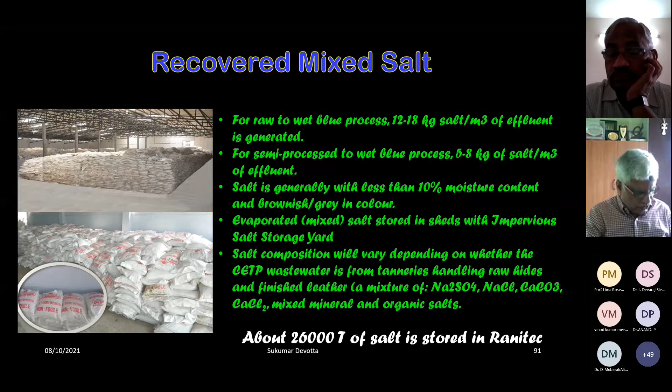Water is recovered, you've solved the water problem, but salt still remains an issue. So they are struggling to find a way to get pure salt, at least pure sodium chloride or pure sodium sulfate. There are attempts now to design multiple effect evaporators wherein you can in situ separate, to some extent, sodium sulfate or sodium chloride. So there are attempts now, but still some work is going on.

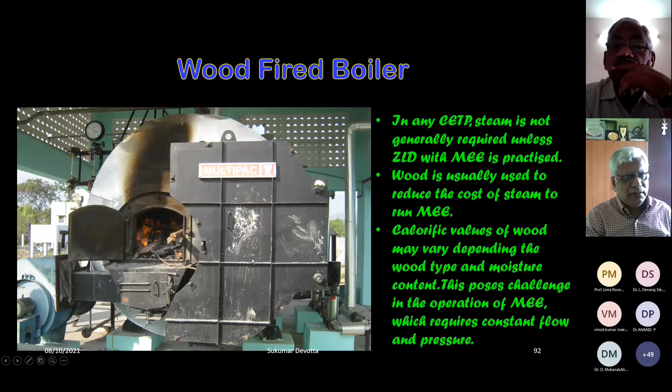They use wood as fuel for the boiler. So this is the various stages of wastewater, and what you get finally is like drinking water. You can drink it, people show that they can drink it because it is as good as bottled water you buy. And that water is stored, and this is the one which by gravity goes back to all the individual tanneries. So once water is treated, it's stored in an overhead tank, and then it is sent back to all the tanneries.

So you have a lot of cost involved, RO involved. In fact, if you look at it, primary and secondary treatment are mandatory, but that constitutes only 35% of the cost. The rest, constituting about 65% of the cost, is for advanced tertiary treatment.

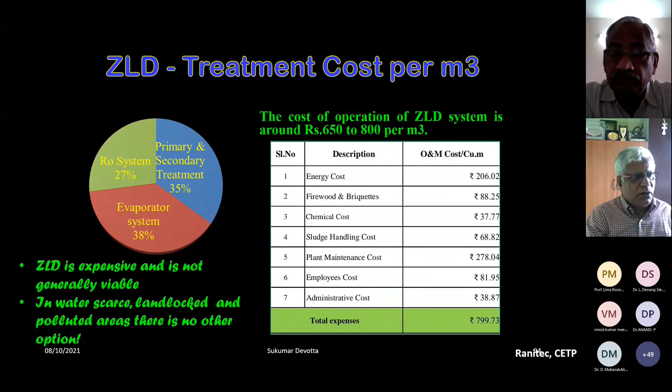Today, you can treat water probably for 100 rupees per meter cube, but if you want to do ZLD, it may be around 800 rupees per meter cube. That means my cost of ZLD is very expensive. So people are struggling to minimize cost. We are working on ways to minimize cost, particularly minimizing the salt content.

So some people have started mixing with sewage, but that is allowed in some CETPs. In the leather sector, it's very rare, but it is allowed in one or two. In textile CETPs, it's still allowed, I see that. Marine discharge is not feasible in Tamil Nadu because if you want to take treated water from Vellore to Marina, you have to go through a huge distance, about a 100-kilometer pipeline. It's not feasible. We don't recommend pipeline discharge at all because people will simply break it and use that water, although it will be high TDS. They don't care, they can use it for washing and other purposes.

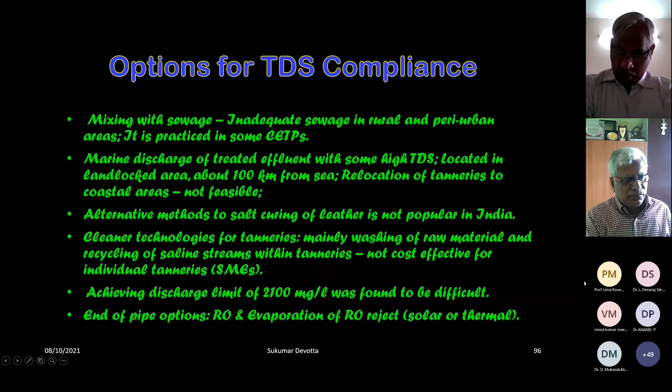Minimizing the salt is another clean technology option. It costs a lot, but it's still being practiced. They are still struggling to find out what to do with the salt. There is pressure on them to dispose of it via TSDF, which will cost them a fortune. So it's still an issue to be solved. If you have ideas to work on that, I suggest you start looking at how to purify salt, how to deal with salt in the multiple effect evaporator.

Because of this design of multiple effect evaporator, I have done quite a bit of research during my early days in sugar. I can tell you, if you have a good package like Chemcad or Aspen, you can do this very easily.

But you need a lot of industrial data and analysis, because Aspen will only give you a solution. It won't tell you the concentration of feed water and what salts are there. You have to provide that information, because that will affect the evaporation.

And then it is becoming very popular now. I have visited ZLD plants in pharmaceutical industry, pulp and paper in the Ganga belt, sugar and distilleries in the Ganga belt, tanneries in Tamil Nadu, textile dyeing in Tamil Nadu, and some chemical industry in the Ganga belt. So all these things are being practiced and it's quite challenging.

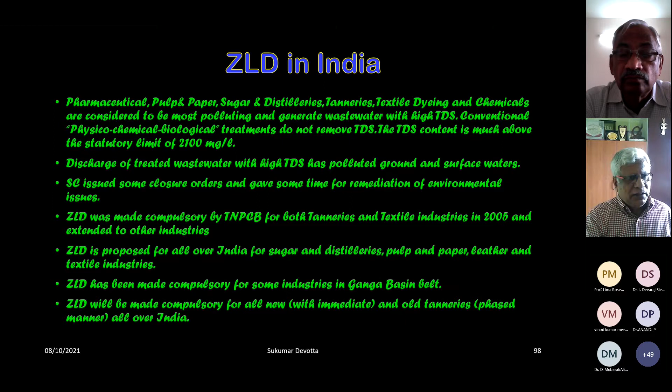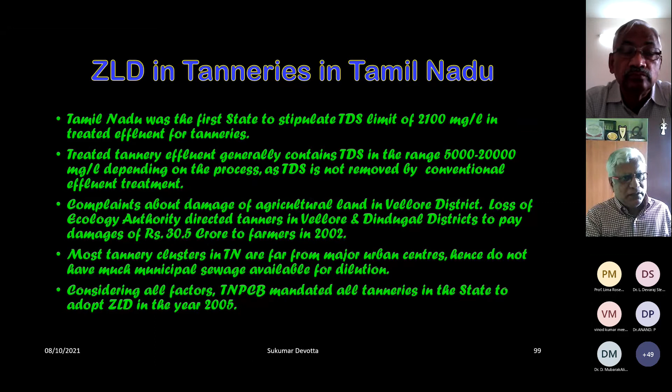Tannery in Tamil Nadu is one of the best in India, I would say, in ZLD. A lot of plants are operating, 10 to 12 are operating with ZLD, huge CETPs.

They use generators because if power fails, you cannot restart a multiple effect evaporator like that. It requires a shutdown procedure because you're dealing with salt. If it chokes, you have to immediately drain the water and wash it. Therefore, they prefer to run the unit using generators instead of going through a very difficult emergency shutdown procedure.

I repeat the same thing. One of the ways of doing it, can we separate the sodium chloride and sodium sulfate water? Then it becomes easier to use the recovered salt. But it is a big challenge because it's not added in sequential form, it gets added in different processes.

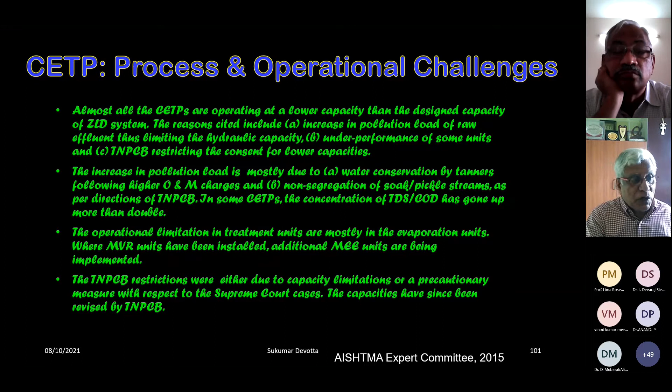So now people are looking at how to avoid one of the salts. People have managed in textiles because there it is added at only one point, and they now concentrate on sodium chloride. So they are able to do that to some extent in some textiles, but not in leather yet.

So evaporation, RO and evaporation, these are the major challenges. You should go and see to understand the complexity of their operations. It's still an operational issue, and it's important for future ZLD.

It's costly, but it will be forced, you cannot get away, you have to do that. But you have to find ways and means of minimizing the cost, and even recovering and reusing salt will be critical for the future, otherwise it will become much more expensive. There's a lot of scope for research in this area.

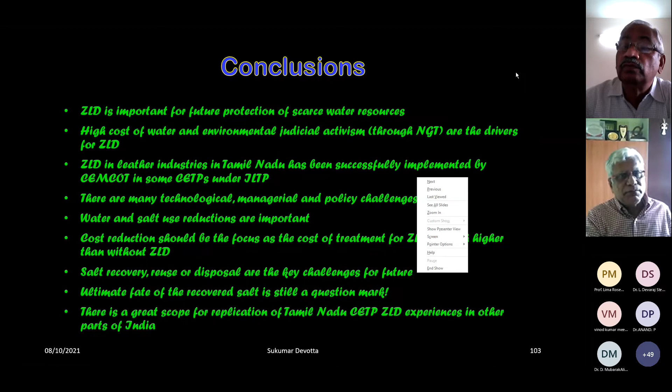Because I've used a lot of proprietary data and information from leather industries, I thank them very much. So, if you have interest in environment protection, this is one area I recommend you to work on, ZLD. Thank you.